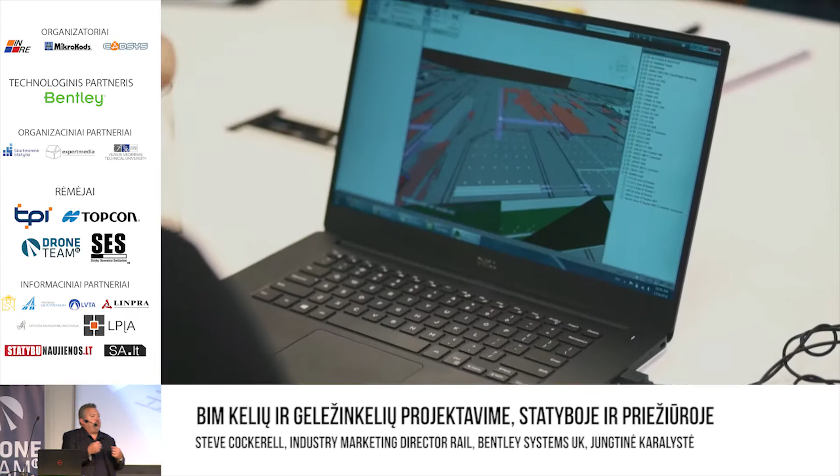I'll play the video so that you can at least see the pictures of the project. But basically what we're talking about, and what he's talking about, is the challenges that they had on this second of 3 lines that are being planned in the Kuala Lumpur area of Malaysia. They came across a lot of different challenges with managing all of the different relationships between the people, the disciplines, and all the data that needed to be exchanged amongst all of the different stakeholders.

And on this second of 3 projects, they look to put things right by using what we call a connected data environment, and that's where I'm going to go on to next, because that connected data environment, or CDE, is another reference to the beyond. We're moving beyond the common data environment to a connected data environment. So it's important to understand what that means.

At Bentley, we talk about digital context, and that can mean many things, from the reality models that you've seen to traditional survey information, anything that provides context to the job that you're doing at that particular time. Digital components, and that can be many different things. I work in the rail area for Bentley Systems, and we're working with Siemens, for example. So components to them might mean the different catenary components, the overhead line engineering components and structures and wire. But it's the components or the objects that are actually created and built and become your assets in the future.

And then the all-important workflows. And we saw right from the very first presentation this morning, those BIM workflows, including PAS 1192. And after the break, you'll hear from my colleague Ian Miskimin. And that's really at the core of our work with the Crossrail Academy, and a lot of the reasons for why that has been such a successful exercise.

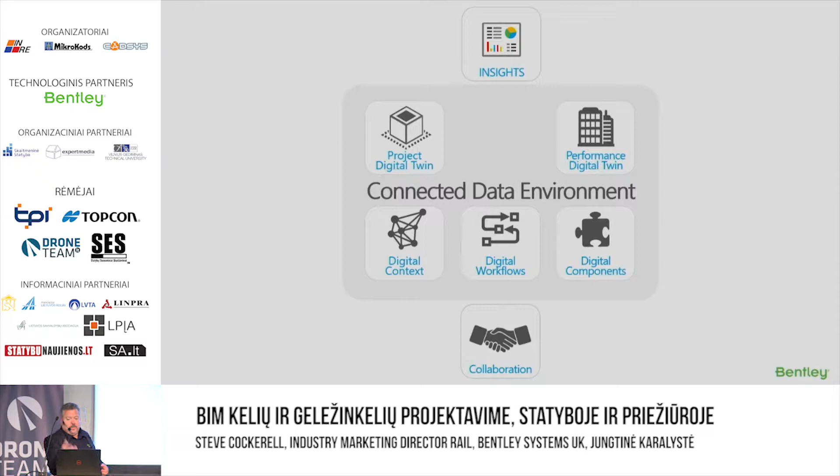Because the CDE goes not just through design and construction, it covers the whole life cycle. And we're creating both a project digital twin, a project digital version, and a performance digital twin. One that we can gain insight into using iModels throughout the process, gain insight to enable better decisions during the design process, or indeed on how to more reliably or more effectively manage your assets as an owner and operator. And as Stefan spoke before about ProjectWise on the collaboration side as well.

So for the main part of my presentation, for this last half an hour, I'm going to spend about 15 minutes each on both road and railways, and give you an idea of our current solution, both for the 2 industries that I work within. But I'm going to kick it off with roads.

And hopefully you will have heard of OpenRoads. It's the successor to a number of products that Bentley had in the civil design space. And it goes and takes us through predominantly design and build, but thinking of the future into operations, which is where I'm going to start using some AssetWise tools. Now, AssetWise, as the name suggests, is helping you get wise on how your assets are working, how they're deteriorating in condition perhaps, and how you can change the decisions to improve the outcomes.

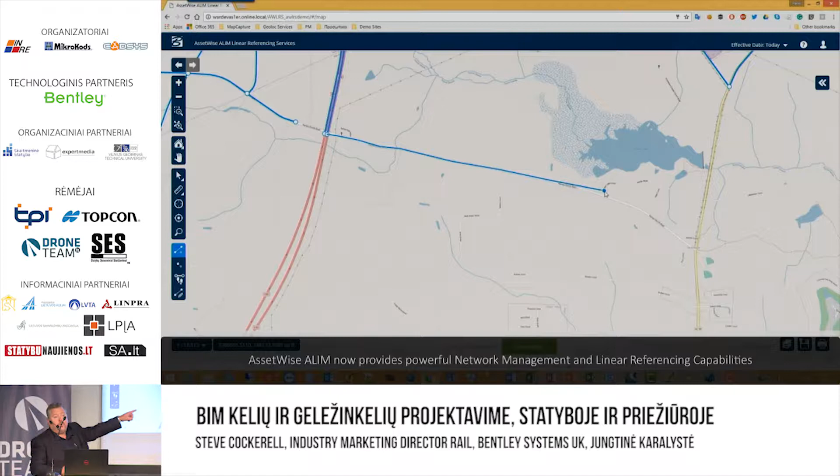So here we're looking at an existing road network, and we're using our AssetWise linear referencing system to be able to say we're going to actually look to put an upgraded road between these 2 major roadways, we can actually assign various attributes to them that become part of the information that we will manage.

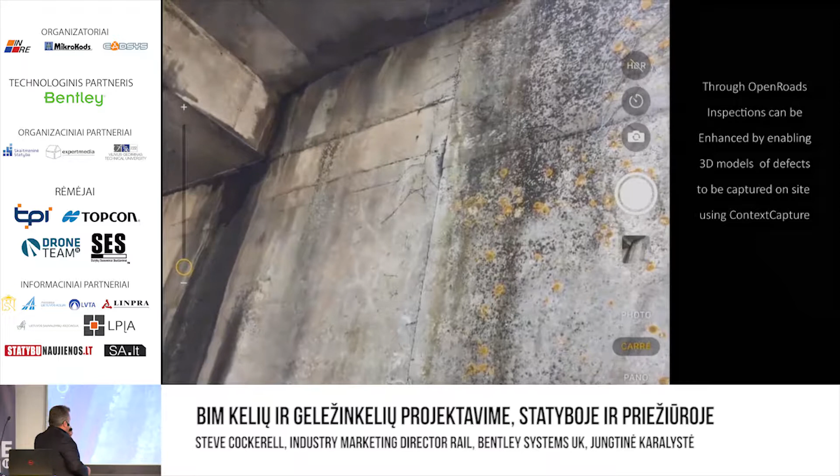But the key reason for me to show you this video is Stefan showed you the huge model of Paris that have been created from that contextual information, from the digital photographs. We can use it in inspection as well. We can use it in operations. And here, the guy in the field or the girl in the field is taking pictures with their mobile phone, and then we can send those up to ContextCapture.

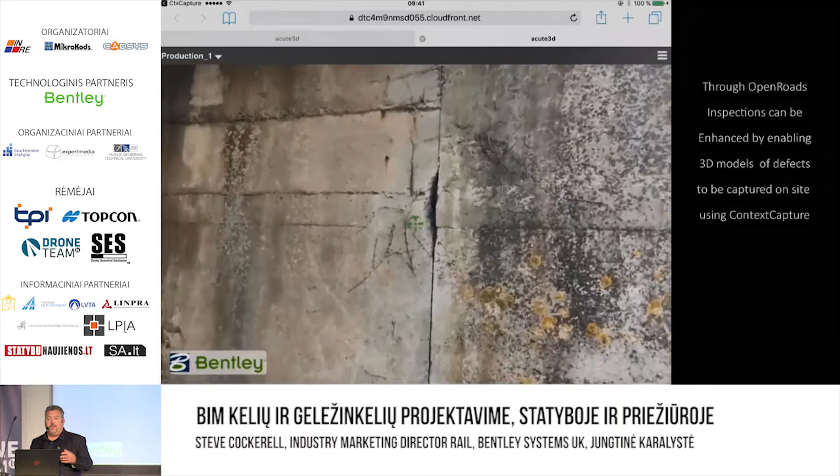You can see it's only a few pictures. And up in the cloud, we create a reality mesh. We create a 3D model that we can then move around, we can view, we can measure, we can interrogate, and importantly, we can store as a record of the condition at that point in time against our asset database.

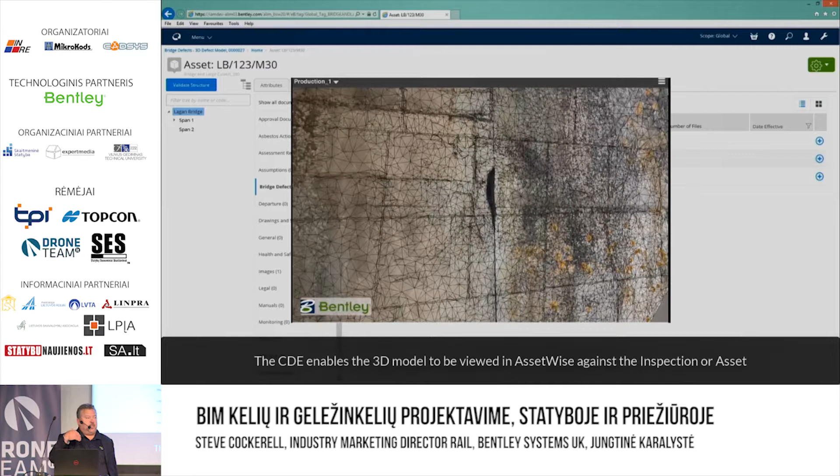Now, that information can be used to perhaps do remedial works on the bridge, or perhaps it's a reason for a bridge upgrade. You're using that information during an operational part of the life cycle to aid your decisions in design and construction, which is where I'm going next.

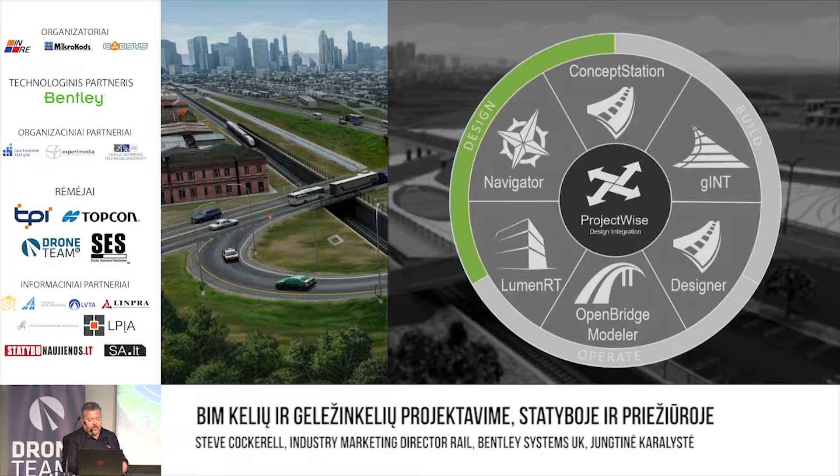In design, we have a number of products under the OpenRoads banner. We have conceptual design with OpenRoads ConceptStation, gINT geotechnical solution, and earlier this summer Bentley acquired two companies in the subsurface area of the market, called Plaxis and SoilVision. You may have heard of them, and they really do strengthen our subsurface capabilities. Then Designer and OpenBridge Modeler for highways and bridge design, before looking at visualization, and as Stefan showed, Navigator for BIM review. ProjectWise is always there as part of our CDE to help with design integration.

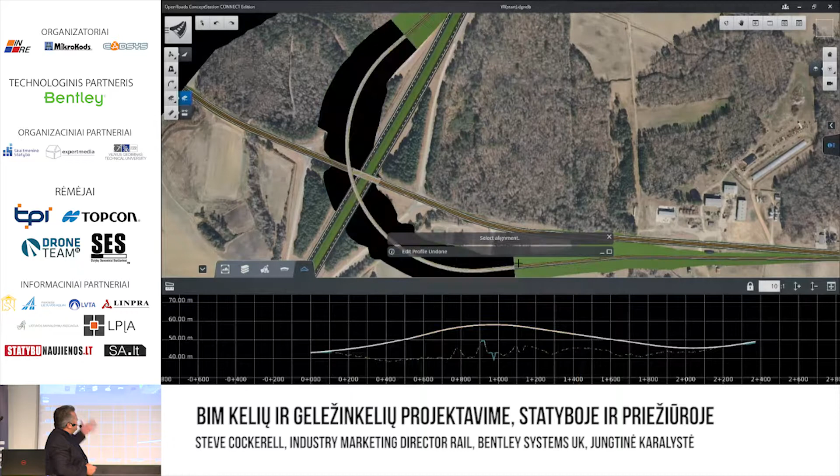Just a short example of a context capture reality model. You can see how ConceptStation allows you to draw in your proposed roads. We're changing an earthworks length of roadway into a bridge section. It's very interactive, very easy to use. We can go in and change the design in any way we want to. Here we're seeing how a link road is designed between those roads, a ramp is designed between the two, or indeed we can design roundabouts in there.

Hopefully you'll see how interactive and how quick and easy it is to start planning your scheme and your projects. Importantly, at any point in the process, you can click on a button and find out the financial implication of all those decisions you're making. So you can create really inspiring designs, integrate all of the different disciplines, and find out, as it shows right about now, the financial impact of those decisions at the earliest possible point in time.

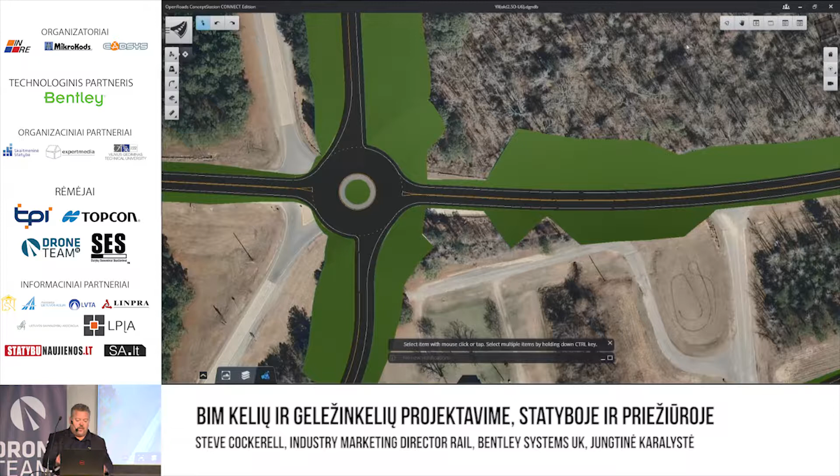CCCC First Highway Engineering in China is a project I wanted to highlight because they had some really quite serious challenges. They needed to model over 3,500 subsurface utilities, and they had 8 major interchanges to design in just 9 short months. They used OpenRoads ConceptStation and Designer to do just that.

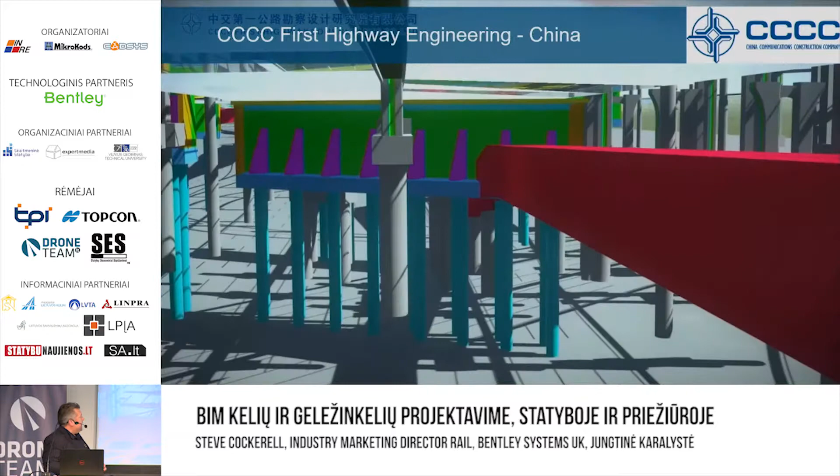This video shows how the clash detection, or more importantly the clash resolution tools within Designer and Navigator, helped them move underground ducting away from all of the different foundations for the new road. That's really what I mean about improving design decisions. Imagine finding a clash between two different disciplines out in the field, and how much money it would cost to fix a problem like that. That might be an extreme example, but it's about solving those problems as early in the process as possible.

CCCC First Highway have improved their 3D collaborative workflow. They've taken out a whole lot of rework that they had experienced on previous projects, and optimized the sharing of information across all of their different disciplines and departments, with some quite significant money savings as well.

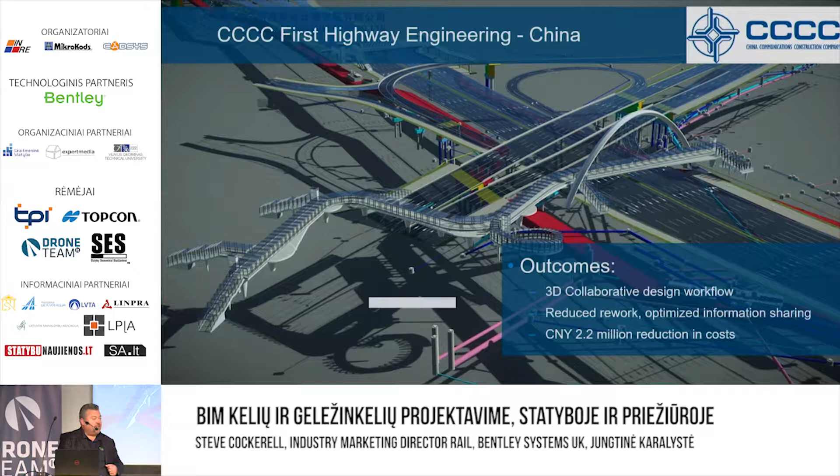Now, one of the other things I mentioned was visualization, and I think visualization is about communicating. They say a picture paints 1,000 words. Out of OpenRoads Designer and ConceptStation, we can leverage a piece of software called LumenRT to create some really lifelike renditions, visualizations, and simulations of our projects.

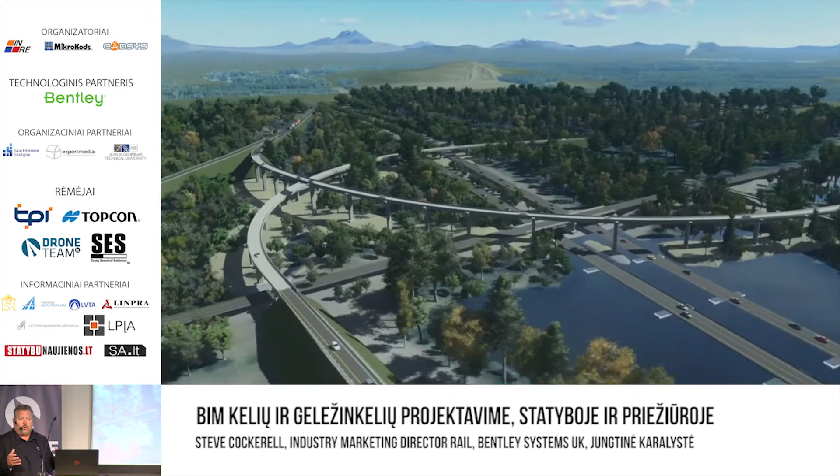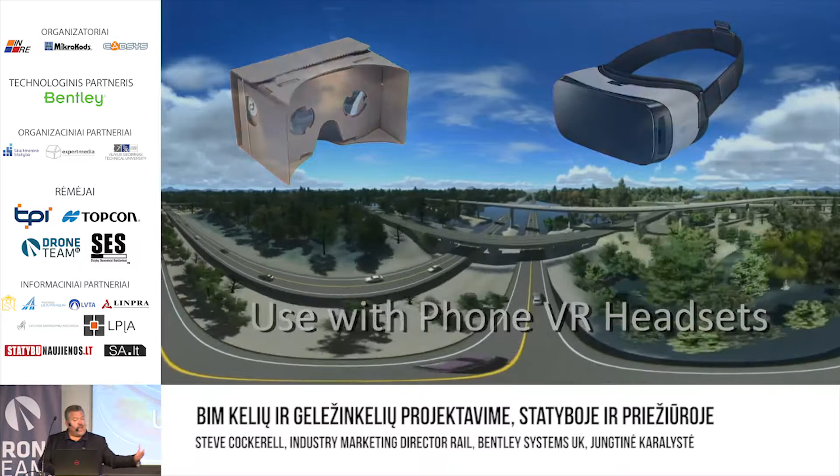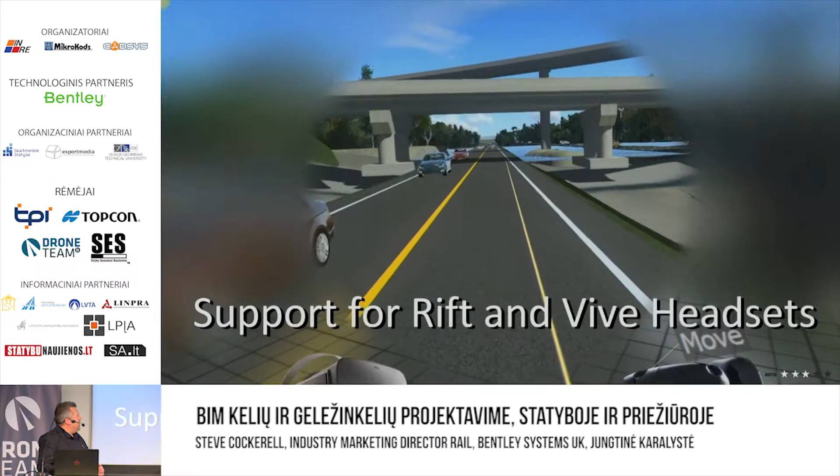Here you see we can also move into a simulation environment. We can leverage VR and augmented reality directly from the engineering models, to be able to immerse yourself in the design, or immerse your customers or members of the public in your design, to communicate and convince them of the value of the projects or infrastructure you're designing, building, or operating. So really changing the game in the way that we can show our engineering designs now.

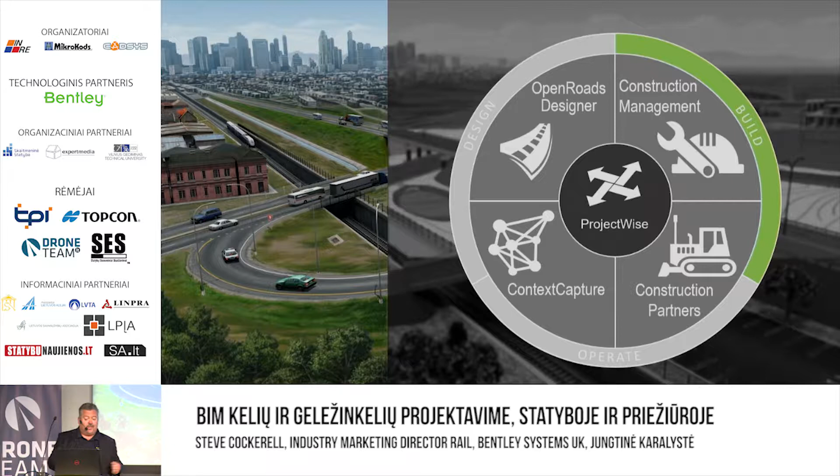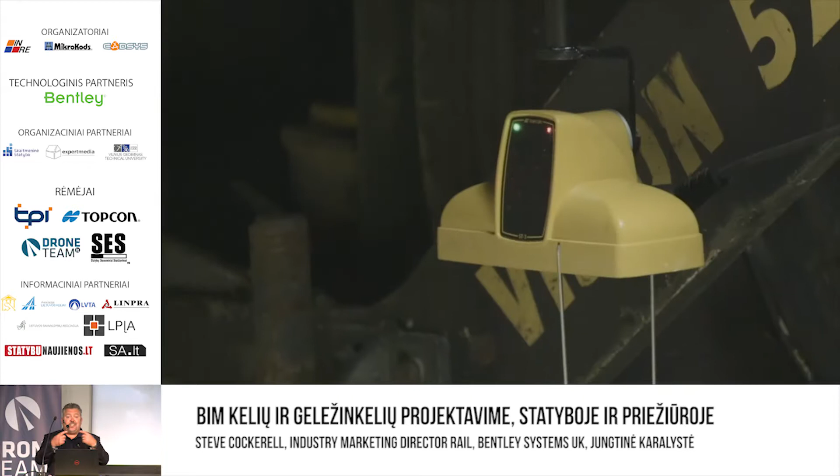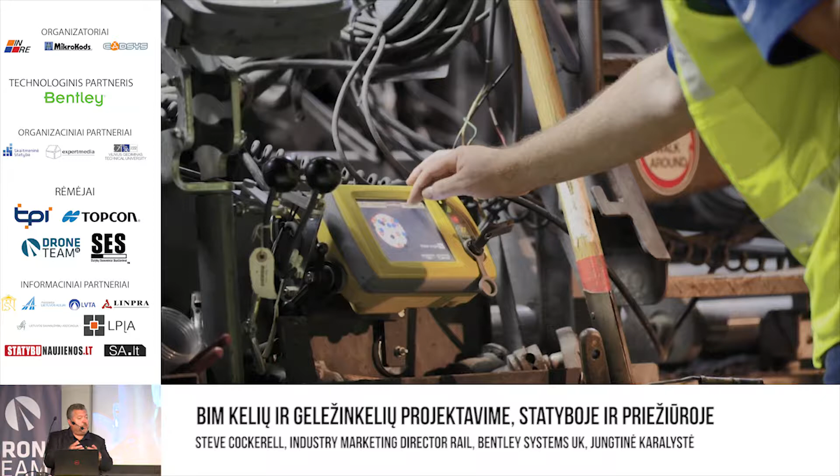Stefan mentioned our strategic partnership with Topcon, and we'll be joined by a colleague from Topcon this afternoon, so I won't dwell on this much. But through our CDE and Topcon's Magnet Enterprise, we can take 3D models directly into the field and onto the machinery used to construct these assets. Not just theoretically, but in reality, we collect information as we're constructing and take that full circle back into our design environment to compare the as-constructed model versus the as-designed model and see if there's a difference, keeping that as an accurate record. But more on that later.

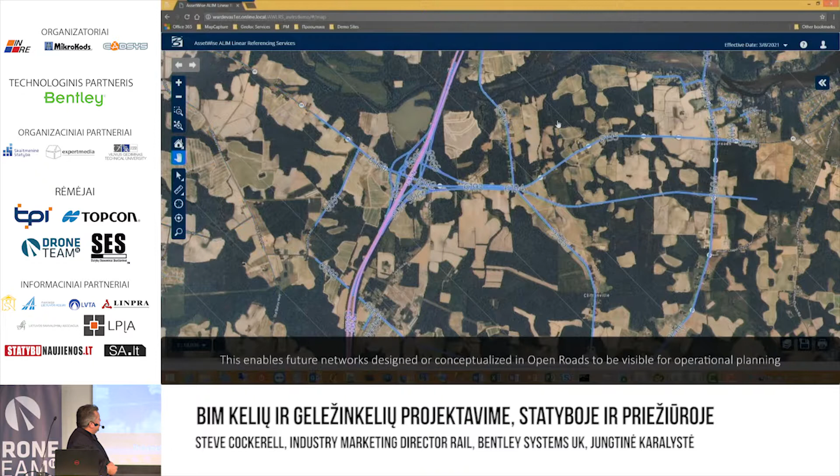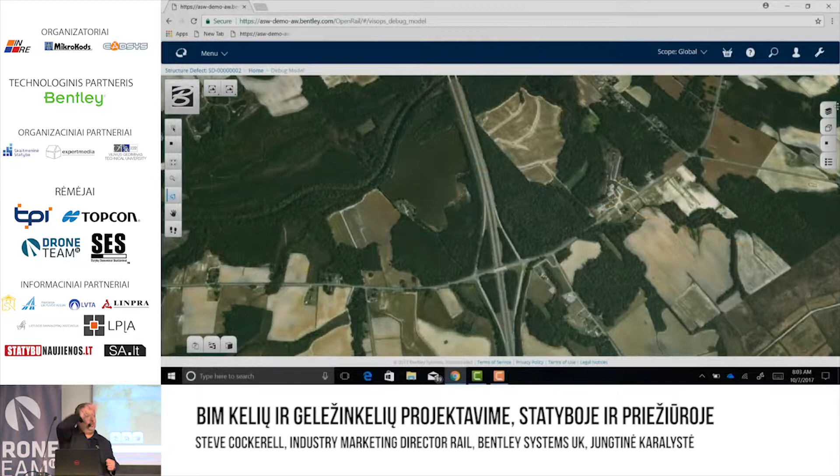As we move into operations, here we have our existing roadway, and we're just changing the date and taking information out of our CDE to update the interchange in that particular area. That is our state moving forward, our roadway network now managed as that upgraded interchange. So we've gone full circle, if you like.

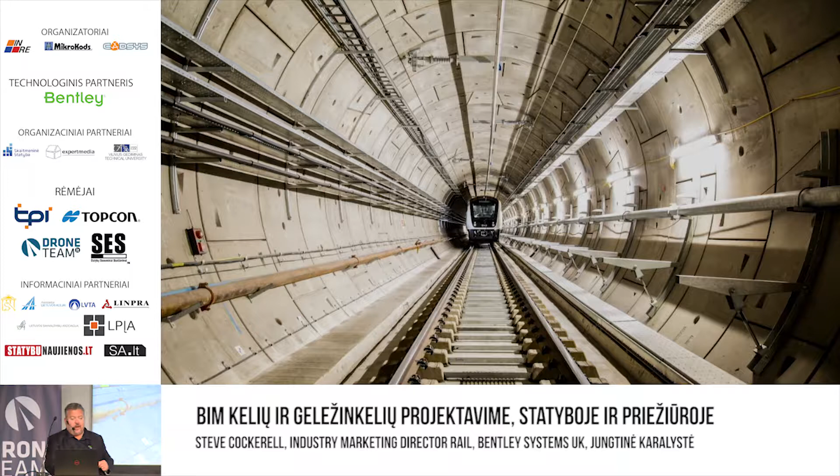You'll see all of the different disciplines involved, not just in designing and constructing the asset, but also maintaining it, which has to be done safely and effectively while you've got people moving through the system and across your rail network. So hugely complex, with a huge number of moving parts and people involved in design, construction and operation.

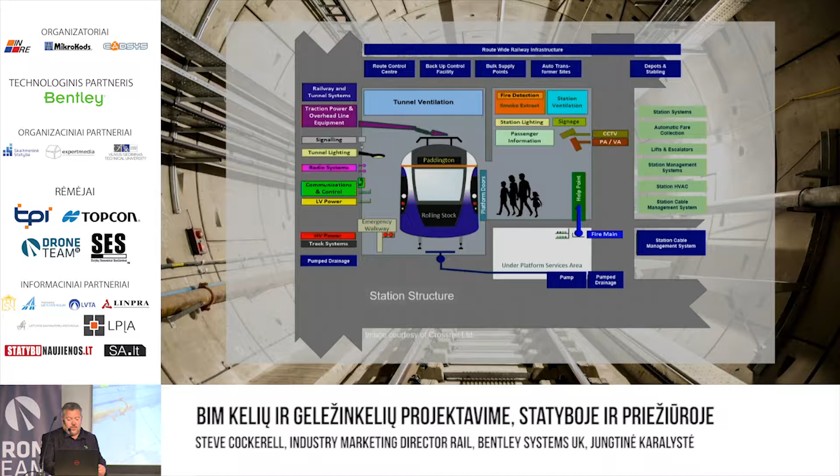And in rail, Bentley chose to take note of other industries. There are other complex industries out there, things like defense, aeronautics, space, or even some areas of manufacturing, that are using something called systems engineering - even in software development.

Put simply, it's a way of getting your ideas and your requirements all the way through preliminary design, specification, detailed design, construction, and then through testing and commissioning to hand over, so that at every step of that journey you ensure that what you wanted is what you're getting. And they use what we call a V diagram.

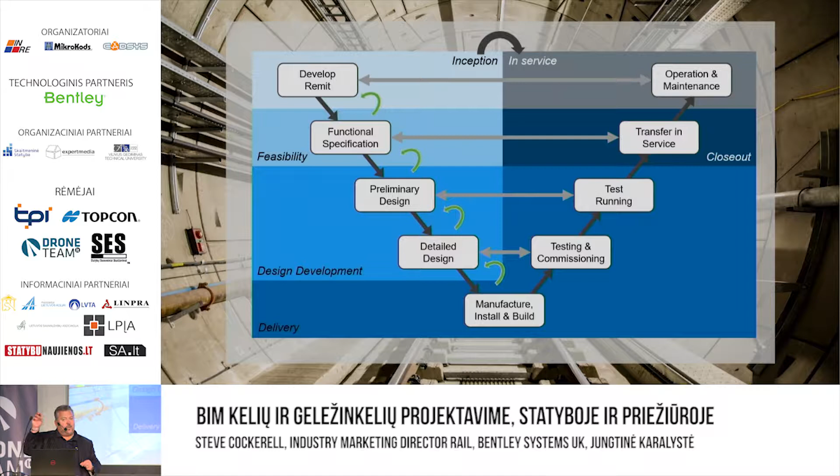Systems engineers use a V diagram, and this is just a simplified way of looking at how to go from your initial ideas through to the asset that you're operating and maintaining in the future. I'm going to use that methodology, that V diagram you see at the top of the screen, as my way of taking you through our rail solution, which is called OpenRail.

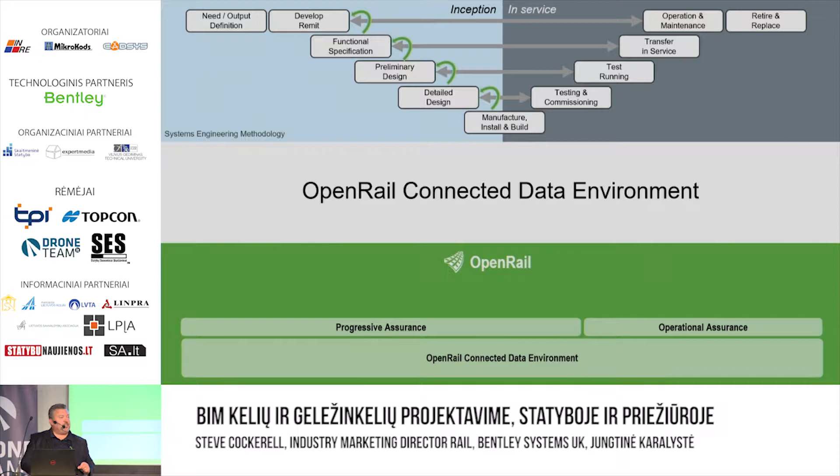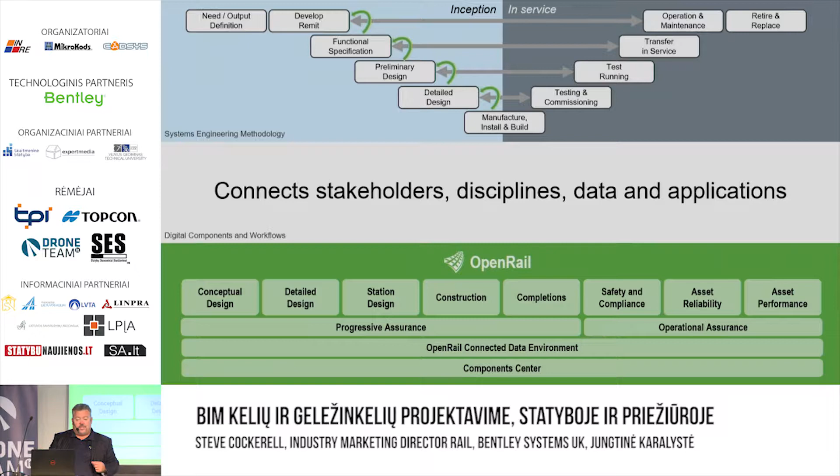In the same way as road is founded upon that CDE, so is rail. We have an OpenRail connected data environment that goes across the whole life cycle, through project delivery and onwards into operations and maintenance. As the slide says, it connects everything - all of the data, all of the people involved in the project, all of the different disciplines involved in the project or asset in an operational state - and brings them all together, allowing them to work more effectively together.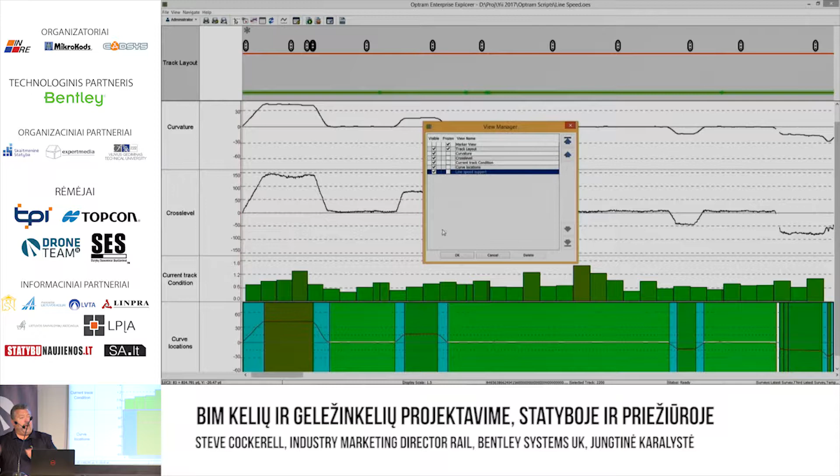Again, I'm going to start in an operational environment, because using Optram operational analytics, which is part of our AssetWise family, we can actually look at the existing condition of our railway, how it's degrading and how it's being maintained, and the geometry information that exists to make better decisions on our design projects, on future projects. In this example, we're running analytics on the existing geometry and condition to work out whether we can increase the line speed.

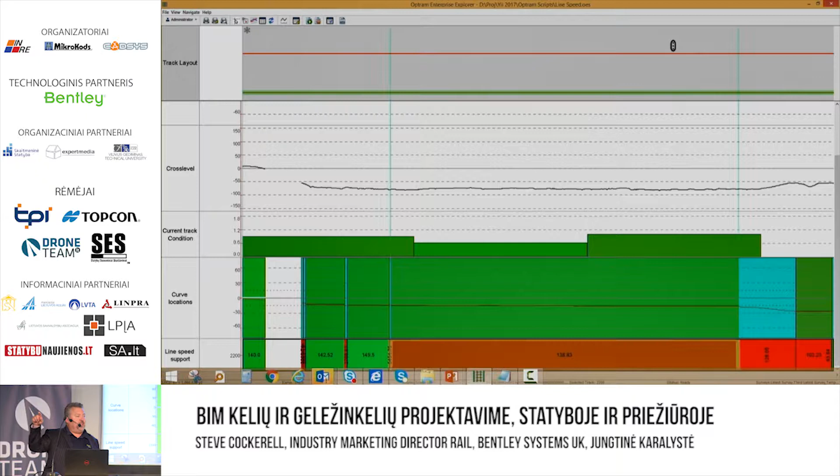So can we reuse this piece of track between A and B at a higher speed? By clicking on the red area here, it says no - according to the criteria you've set for your analytics, the transitions are too short at that point. There will be lengths in green, perhaps, that you can reuse, and then using that analysis you can set decisions and requirements as you move through and start up a new project.

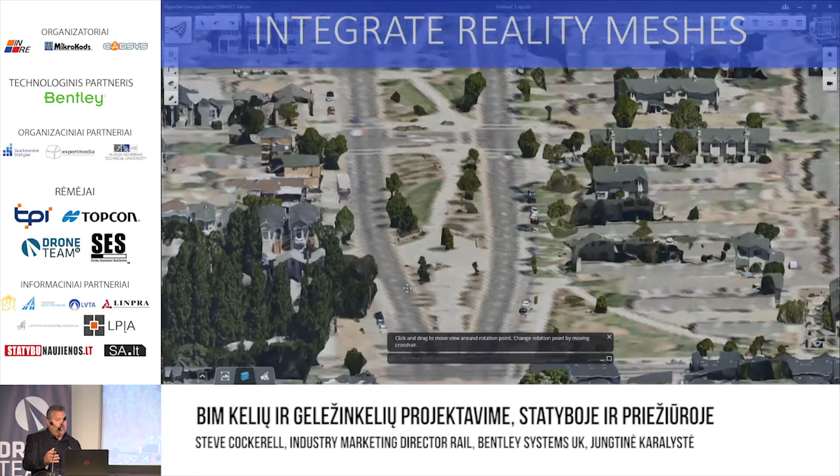On rail, we have OpenRail ConceptStation. I wanted to show this because it goes into a little bit more detail than the road example I gave you earlier. It allows you to bring contextual information in, reality meshes, survey data, or aerial mapping, whatever you need to provide context to the design work you're producing at the time.

Then you start to explore your different design options. Sketch out your design. Where's the new railway going to go? Where are the key points on the design? And you can interactively change that design so you can refine it.

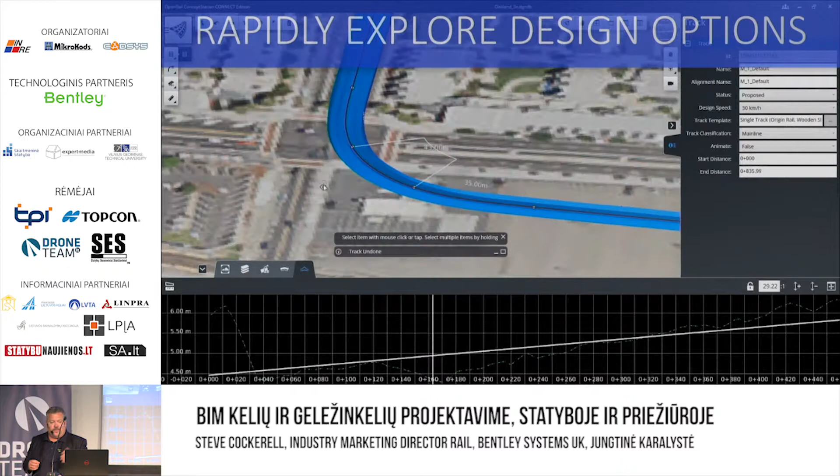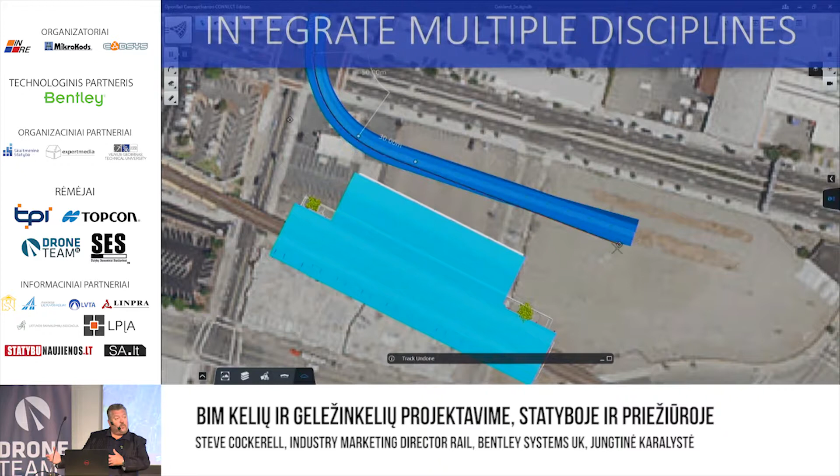In this case, we've got a new railway that we're going to put down the middle of a street. Now, railways tend to be connected by stations, so you might want to bring in a station model designed in Bentley software or another piece of software. Here in 3 dimensions, we can import and reference our station design and then adjust the 3D geometry of our track to match that.

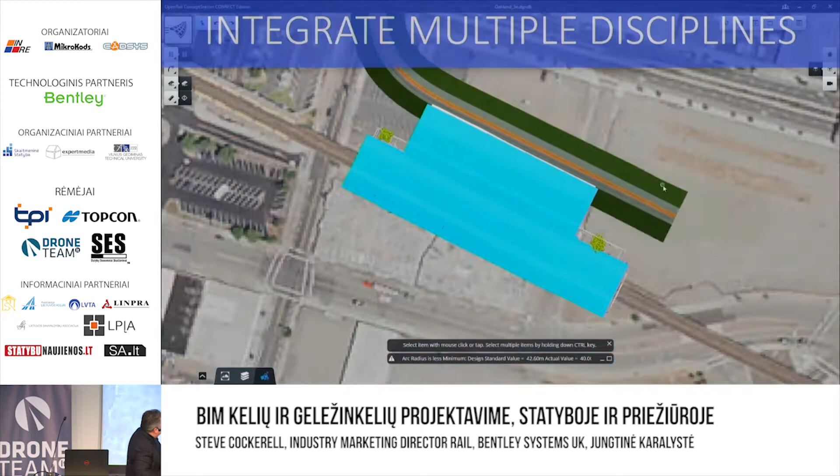You see you've got a profile alongside your perspective view there now. Those of you keeping up with the way this is moving through will recognize that we've got earthworks in the area of the station, which is no good. So we might want to change it to a bridge. You can change the asset types however you want to.

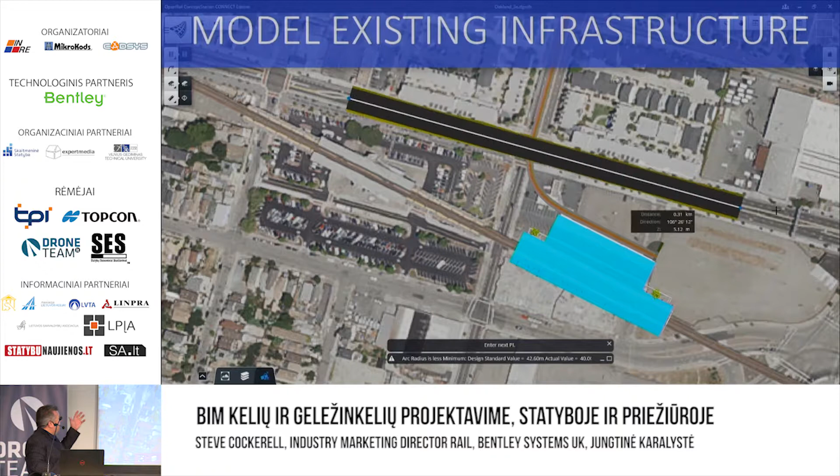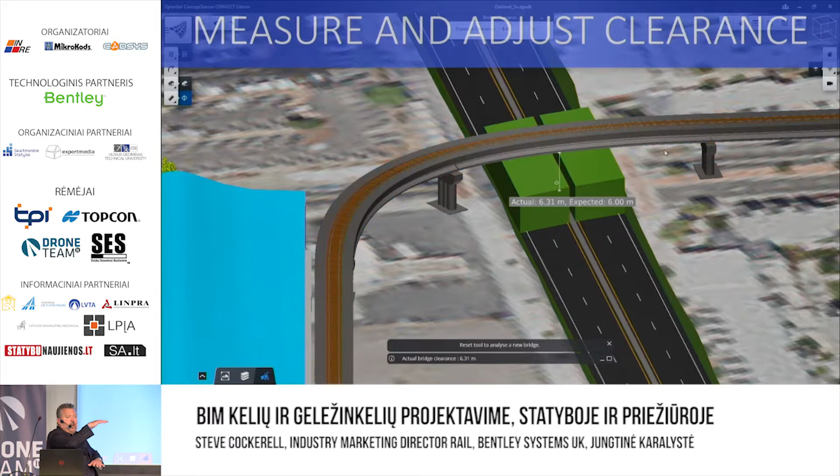You can adjust the design in many different ways. You can model the existing infrastructure, because you're going to need the required clearance between your new track and your existing roadway. Very easily we can say we need 6 meters clearance between the new railway and the roadway. When it's red, no good. Lift the geometry of our railway, it turns green, and we know we're good as far as clearance.

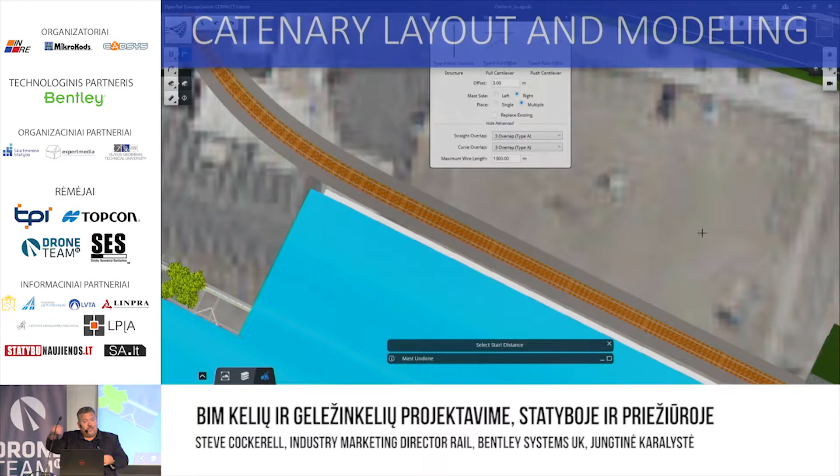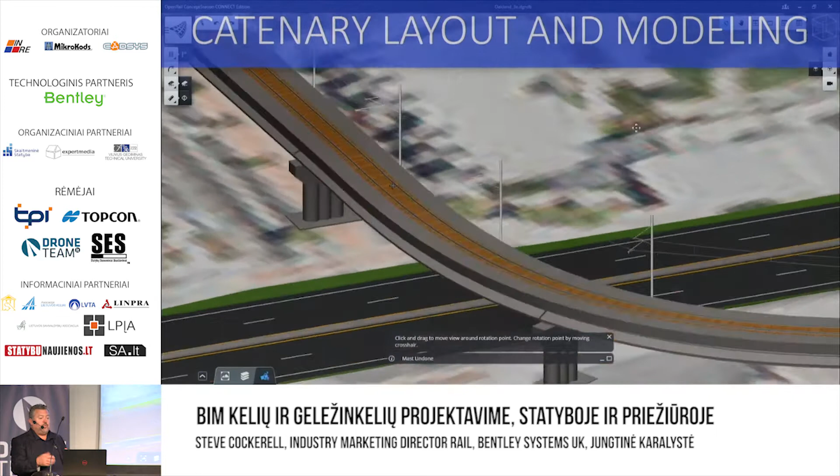So it's very visual, very interactive. We can move the different components and tweak the design as and when we wish. Now we can also start to add other assets, both linear and isolated or individual instances of assets. Here we're adding the overhead line, purely in a conceptual and layout way, but we can model the masts, we can model the catenary and the wires, and change the types and reassign those.

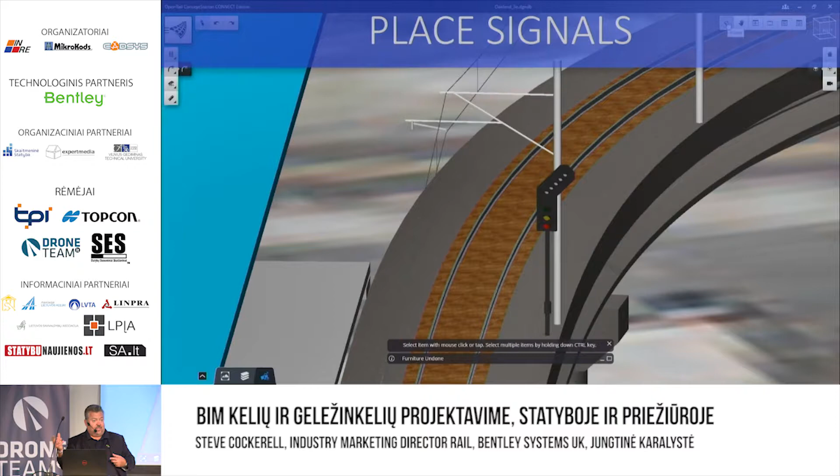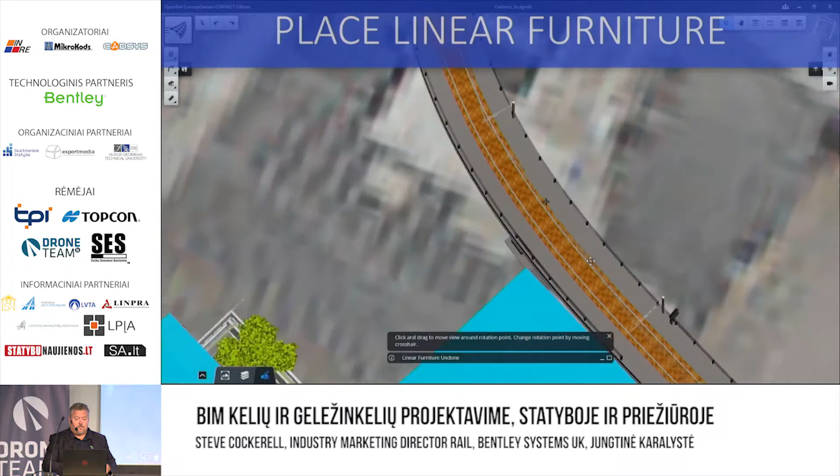I mentioned our relationship with Siemens, and we're working with them to link their SICAT Master overhead line design system, a detailed design system, with our own Open Rail solution. Earlier this week I was in Berlin at InnoTrans, and Bentley and Siemens were previewing that software on their booth. But we can also place barriers, signals, and get costings out at any point in time so you can understand this.

Here's an example of that. You can get a full report, take that out to Excel, or pass it to your own costing solution as well, and then finish up creating some really quite visual designs.

Moving on. We're finding that more and more of the Bentley users I speak to are being asked to go further into the design work to actually win the job than they did before. A lot of the time spent on conceptual design, if you don't win the job, is wasted. But even if you're lucky enough to win that contract, then you've got to almost start again.

Well, with Open Rail, we're removing that step. You can take all of the designs created in Concept Station all the way through into detailed design and reuse that design work, reuse that engineering information, to actually add the detail required for later on in the project. The product we do that with is Open Rail Designer.

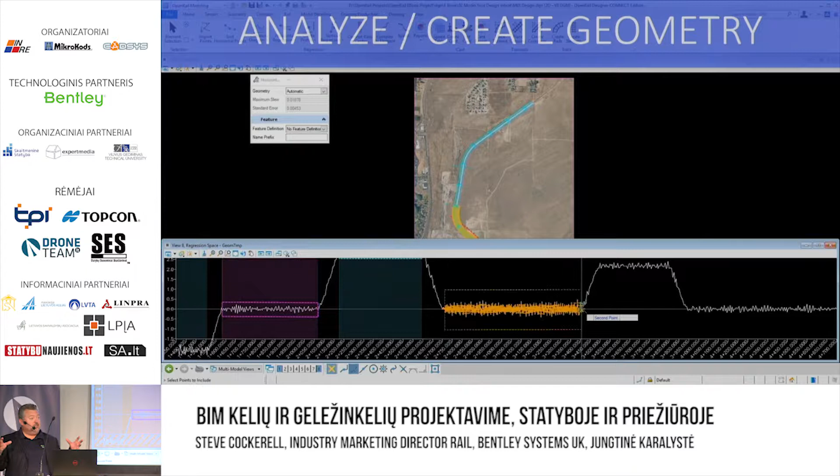So here's another short video of Open Rail Designer, which was launched earlier this year. Here we're actually looking at existing surveyed information and working out where our straights, our transitions, and our arcs are. We're using what we call regression analysis to be able to extract the geometry very quickly and easily, to build your track or centerline alignment.

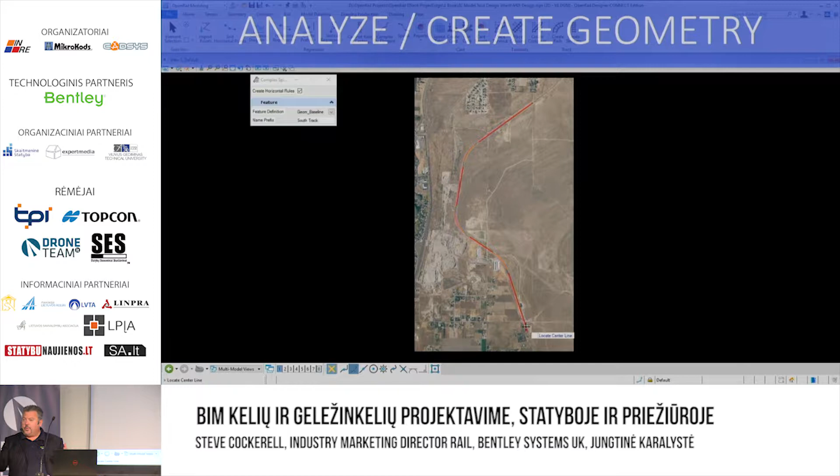And you'll see it's over some aerial mapping there, and we can extract all of the geometry information, coordinates, straights and radiuses. We can place turnouts to lots of different international standards and different classes of rail and transit, be it high-speed rail to street rail, trams, or indeed metros.

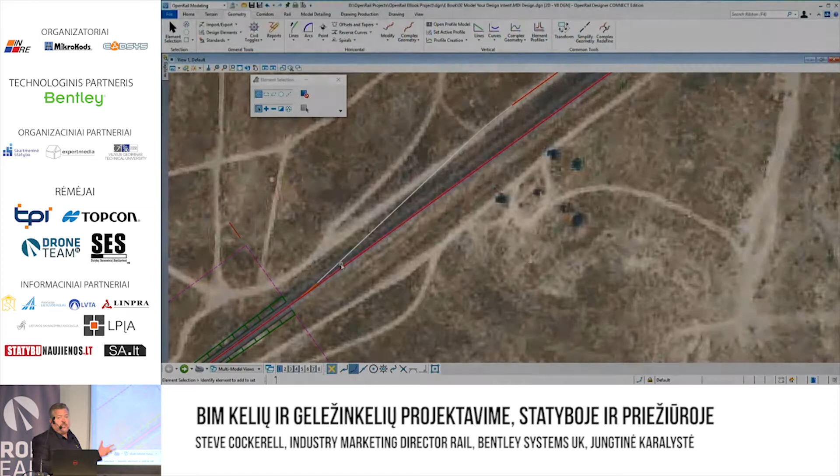It's very interactive again, but at a detailed stage where we've placed a left-hand turnout. We're going to link these two pieces of parallel track. It does all of the connections for you and trims the track very quickly and easily, and makes sure it's to the right level of accuracy that you need.

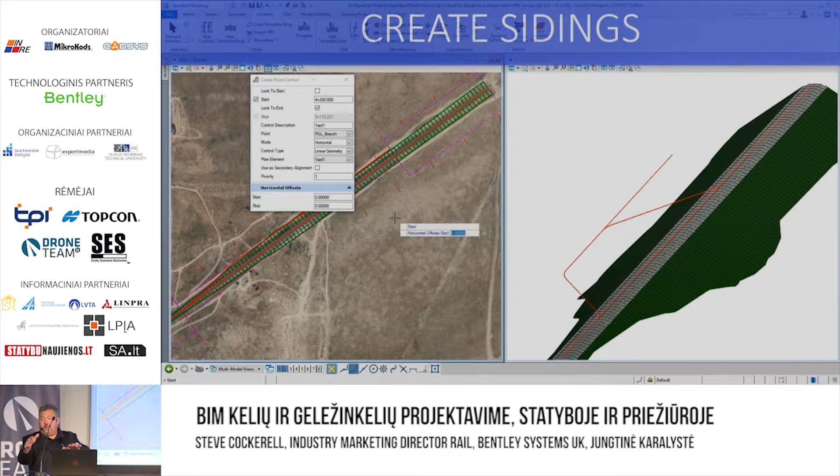In 3D, so we can apply cant or super elevation to our design, or as we see here, design sidings or marshalling yards very quickly and easily in 3D, and start the corridor modeling of our railway as well.

Where are we going next?

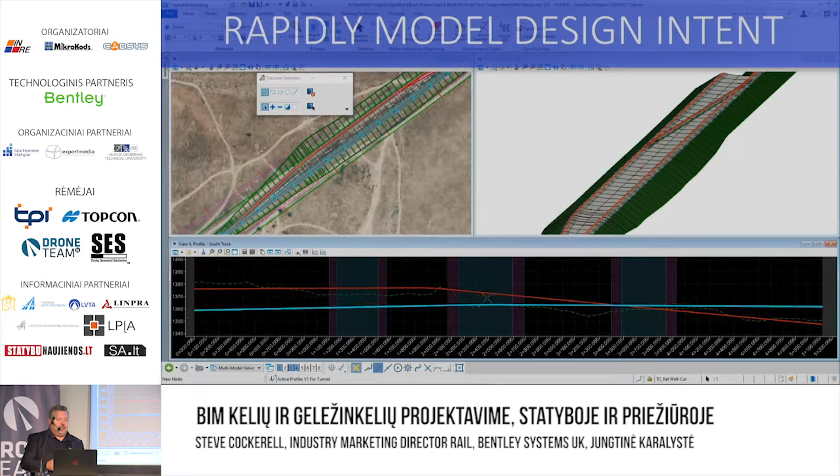So if your design changes at any point in time, it can be quite a task to actually rework or re-engineer as a result of those changes. We call the modeling of design intent the ability to actually recover more quickly from those changes. So we can relate different parts of the design and rules to how they behave.

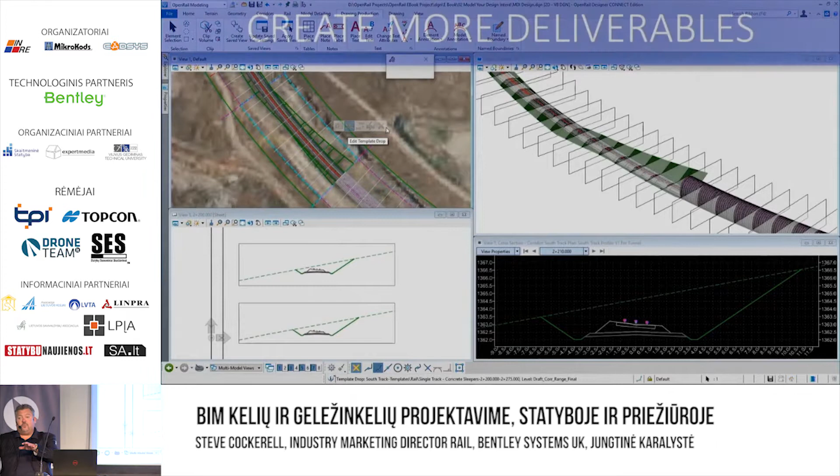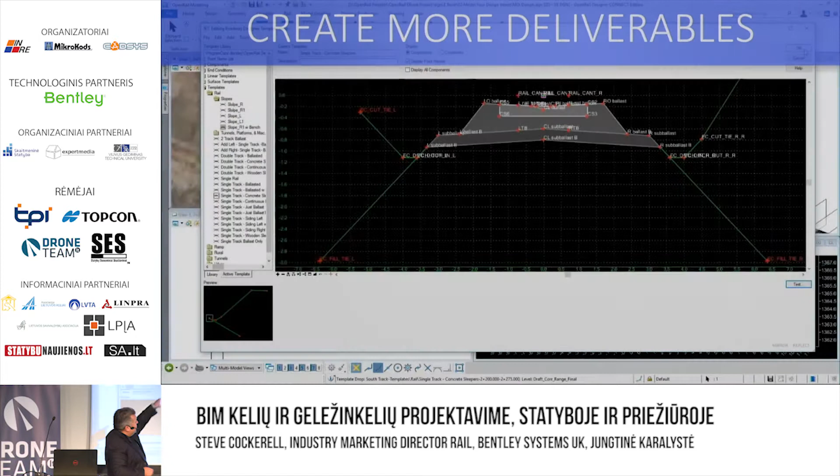So if an alignment moves, either in 2D or 3D, those design changes can ripple through. You see another example of that here, where we're taking out an earthwork strategy on the right-hand side there and just changing it for one with a ditch. And if you watch very carefully after we click OK in the top right here, you'll actually see the design change in an instant.

And with that, not just your design, but all of the drawings, your plans, your profiles and sections that have been created as a result of that. So those design changes ripple through all of the rest of the workflow and onwards into construction.

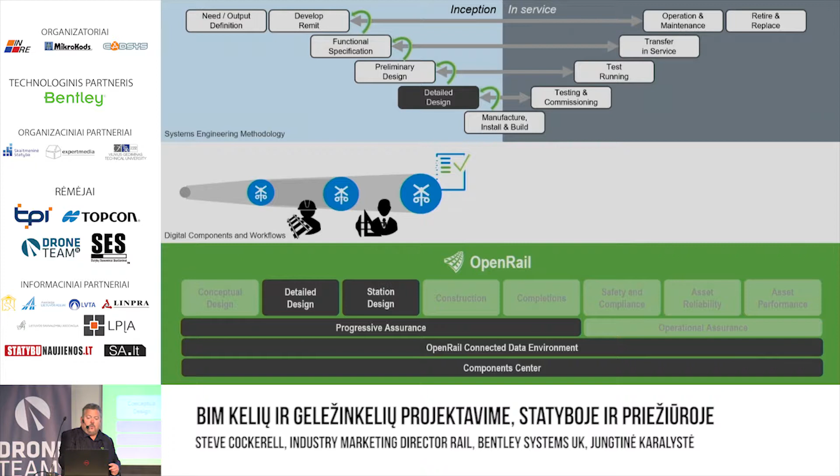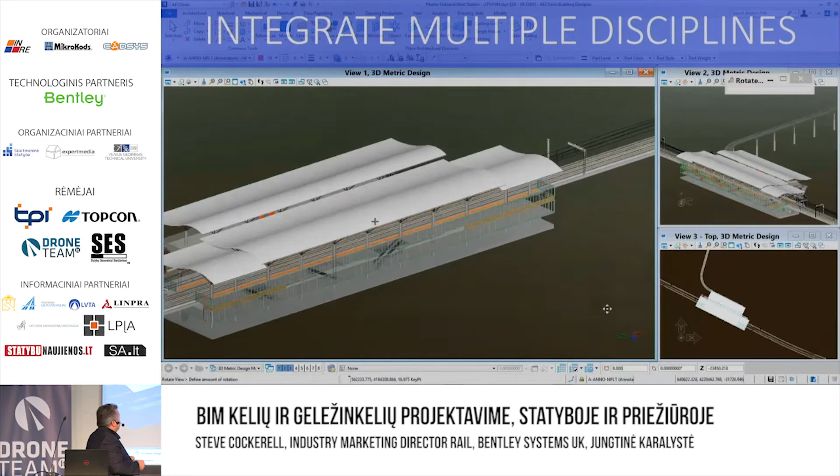But in its current form, it allows you to bring all of the different disciplines together. So here we can see our station model alongside the bridges and the track and the overhead line. We've got a reality model in the background, adding further context to our design work. But Building Designer and Station Designer allow you to model buildings of all types, sizes, or complexity.

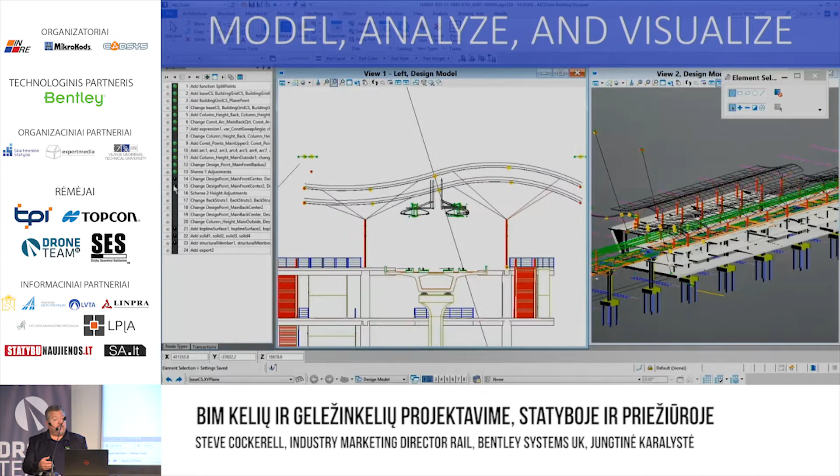You can model them and analyze and also visualize everything to do with that building, including, as we'll see in a moment, construction sequencing and simulation within our OpenBuildings Station Designer product, which will be available soon. That's pretty unique to Bentley's open rail solution.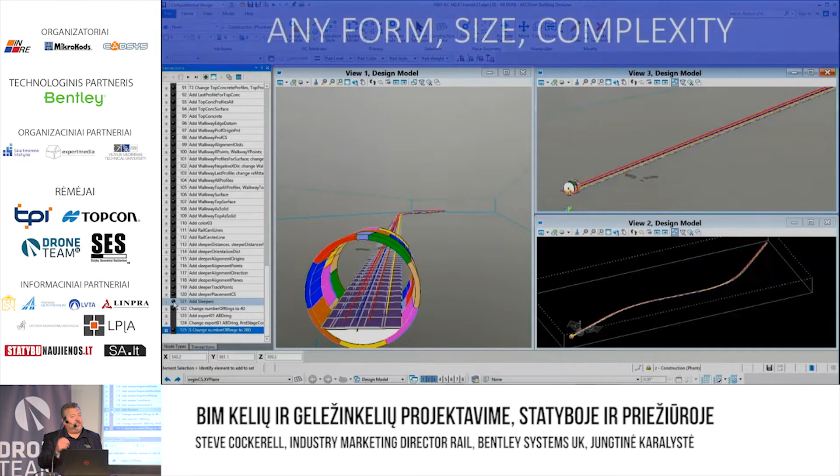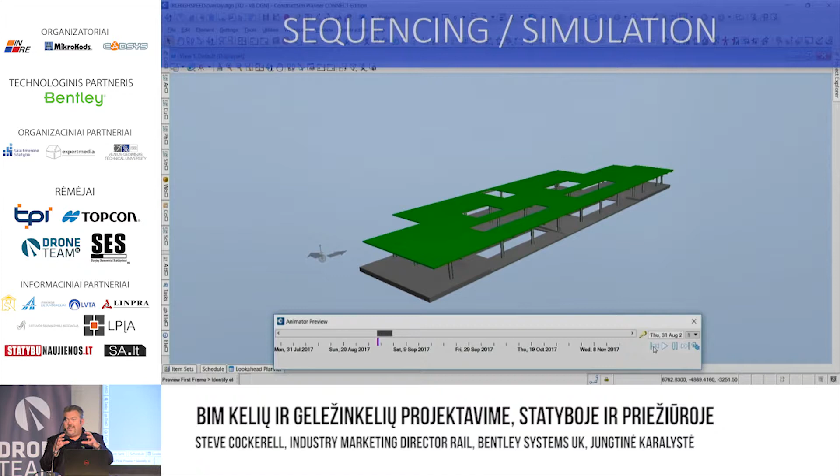Those competitors that we have in this area can bring the information together, but it requires exporting the data and importing into different packages and environments. And of course, every time you transfer information, you export information, you risk devaluing it, you risk losing information. So being able to model everything in that same modeling environment, that comprehensive modeling environment, is a very valuable differentiator between OpenRail and its competitors.

And you see here just some very simple sequencing and simulation. I will just mention the acquisition that Stefan spoke of earlier in the morning, that of Synchro. We will obviously be integrating Synchro and its capabilities, which are very well respected globally, and a lot of their business is actually focused in the rail area, into our OpenRail solution in due course.

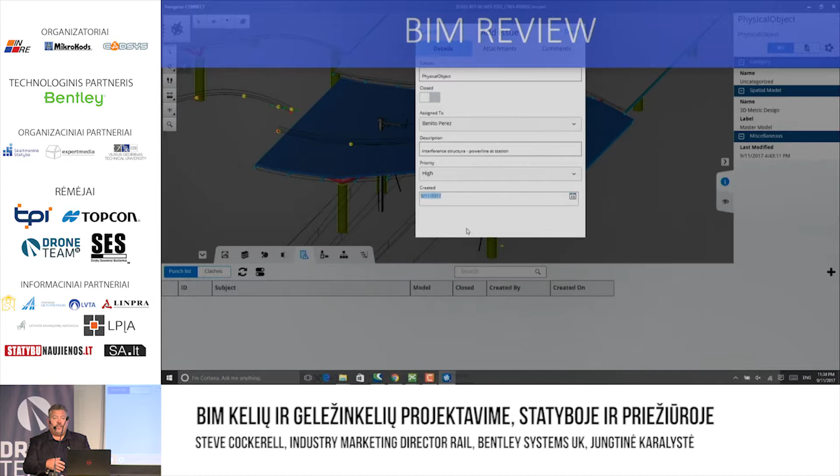I won't spend too much time on BIM review, Stefan has already spoken about it. And we've got a rather extreme example here where we've got an overhead line structure actually poking through our roof structure there. But really it's about bringing all of that information together to spot things like that whilst it's still in the design office, and not whilst you've got people and machinery waiting around costing money. It's about optimizing both the design and the construction schedule as a result of using technology like OpenRail.

Really, it's about getting it right first time, using technology to help you do what you do best, better, and get it right first time, every time. Because ultimately, we want to hand over a safe, compliant asset to the owner so that they have a good base upon which to maintain the asset into the future.

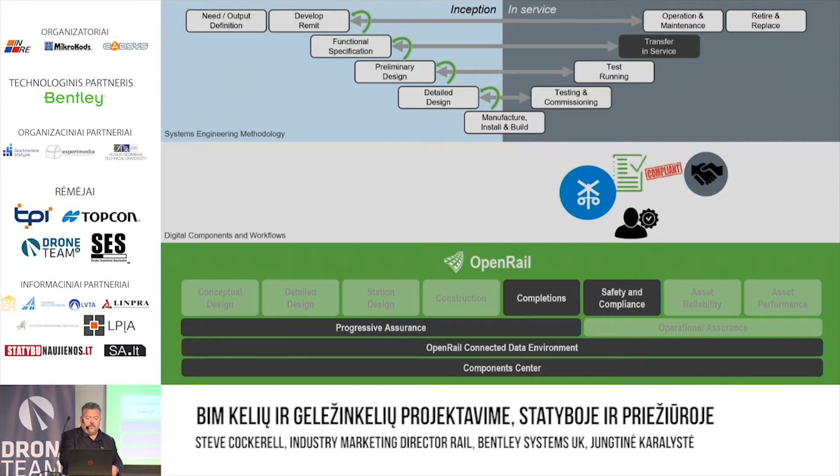Now, straight after the break, Ian Miskimin is going to be talking to you about Crossrail. How many people have heard of Crossrail? Quick show of hands. So maybe just under half. Crossrail is a new east-west rail link across, or actually under, the city of London, up to about a depth of 30 meters below the surface. And if you can imagine the underground network under London and all of the buildings and their foundations, that's quite a complex 3D challenge, as well as, because of the scale, technical challenge and contractual challenge.

It's using public money, so the media is very much focused on its success. It's had a set deadline for completion, which, while that has in the last few weeks been reported as slipping, actually there was a really good article in the Financial Times last week that spoke about it.

The success of Crossrail is in the engineering, I won't say perfection, but the engineering value created throughout the project. And actually, while it did or has gone over time and over budget by a little way, if you compare it to the majority of other major rail projects around the world over the last 15 to 20 years, it's an insignificant overrun in relation to the rest.

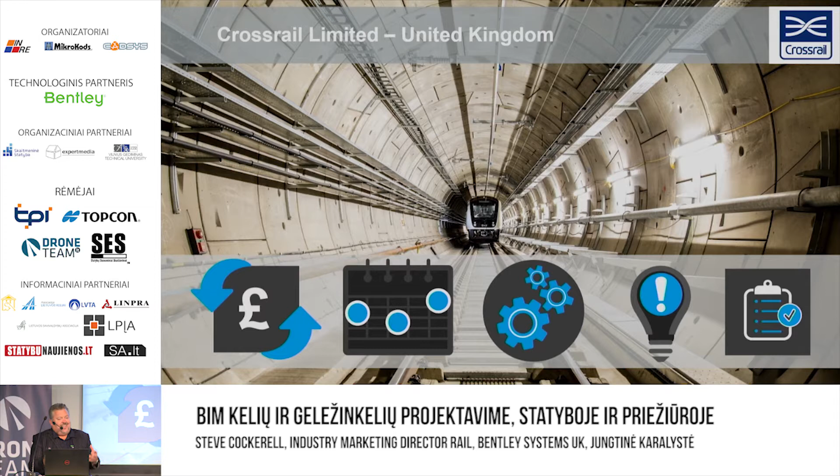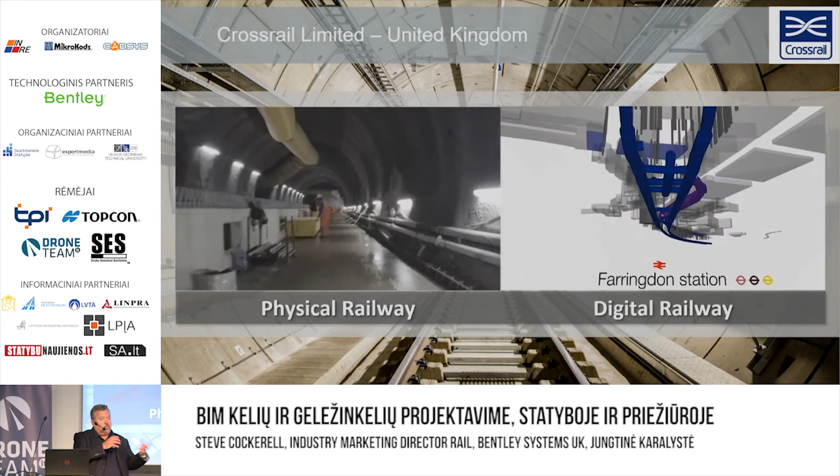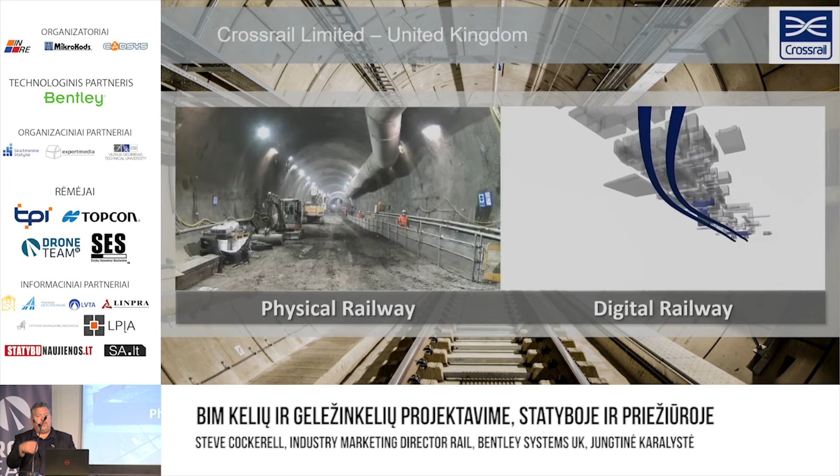And their vision, if you think back to some of my starting slides when I started to talk about the CDE, we had the project delivery twin and the asset performance twin. They talk about delivering two railways: the physical railway that they are nearing completion and are already running trains down as part of the commissioning process, but also a digital twin, a digital version of that railway that is an exact replica that will be used as the basis for their ongoing maintenance of that railway into the future.

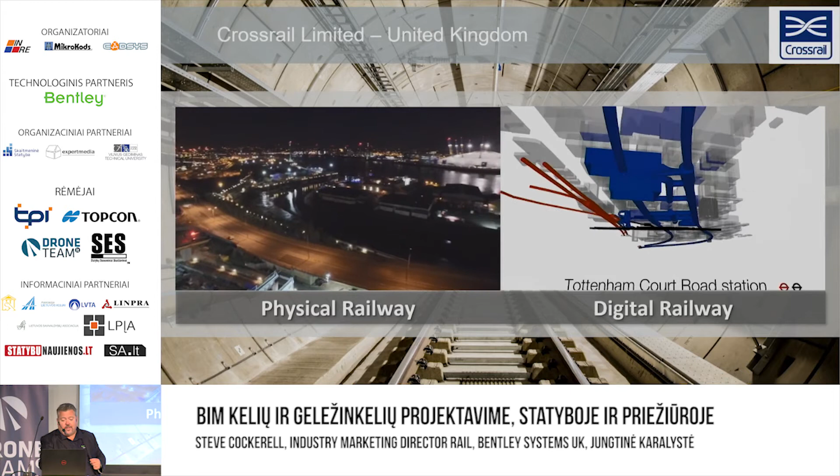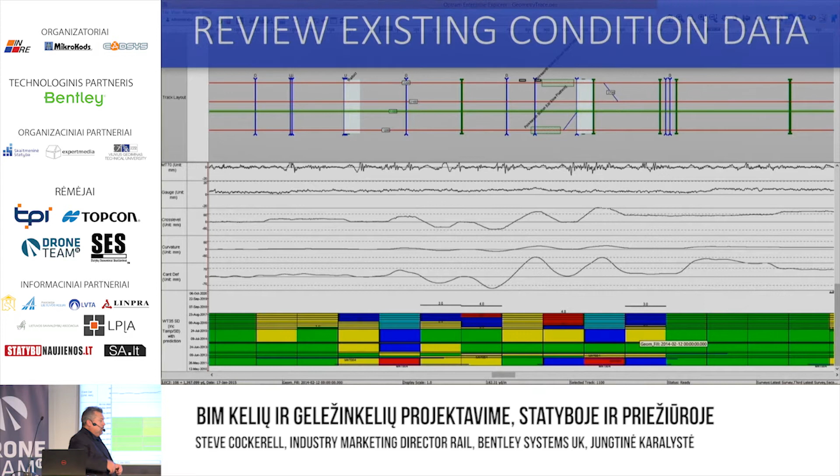So to finish, we're dropped back into operations and maintenance, because here we've got an existing railway. We've sent a track recording vehicle down it, and we can look at how the track is degrading, how we're maintaining it, and start looking at trending of information.

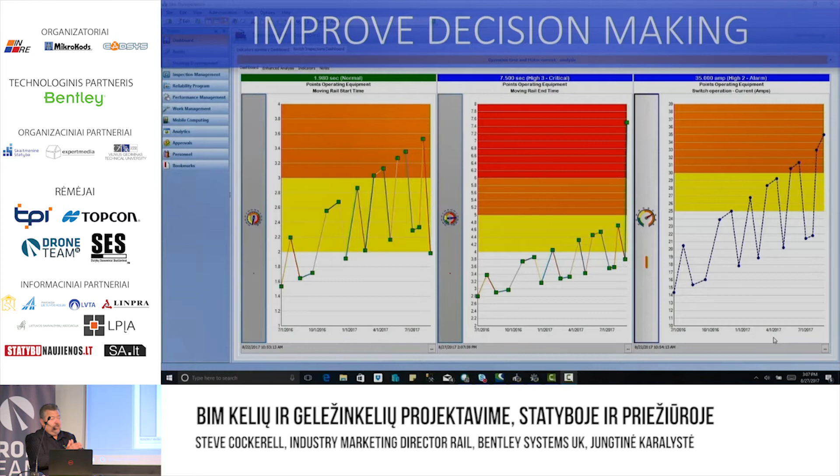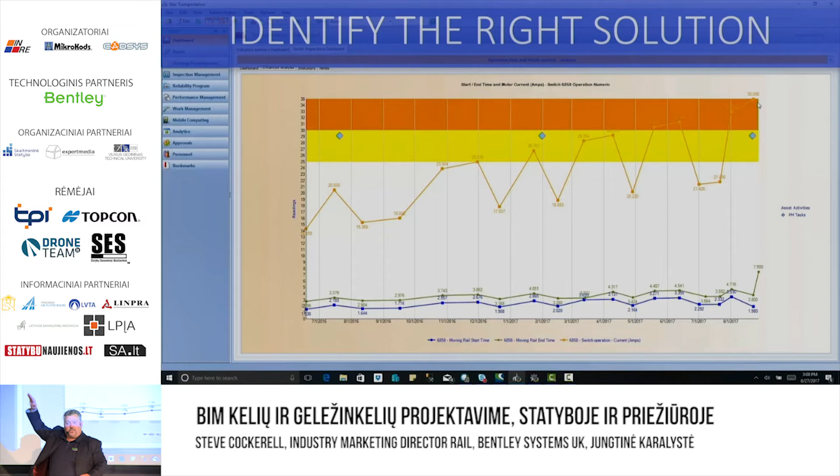I mentioned big data and sensors in the infrastructure. Here, we're looking at some reports from a point, a switch. And we're seeing actually that the time it takes to open the switch has increased dramatically, and the power that it's using has gone way, way up, higher than it should be.

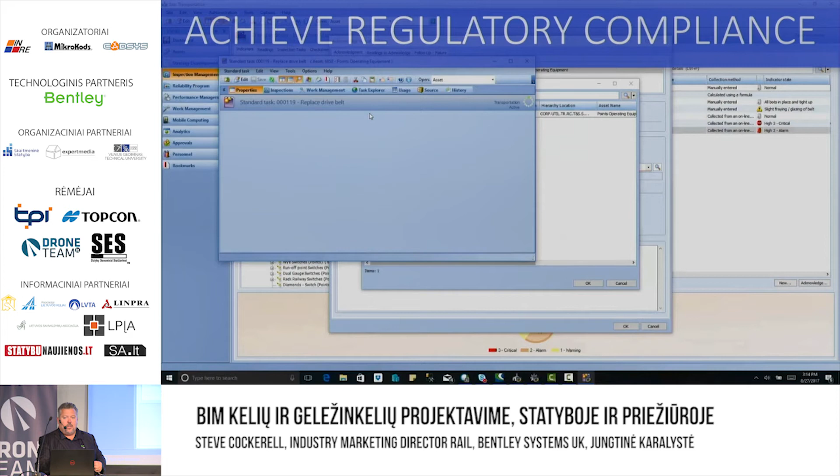So we're getting real-time information about that asset and helping us give insight to be able to improve the decisions that we're making while we maintain it. And this links through, it looks at failure modes, it helps the inspector or the maintainer identify the right solution to be able to then send it out to the crews in the field to go and maintain it, but also achieve the compliance to all of the different standards that are applied in an operational environment.

Ultimately, it's about, whether it's design, construction or operations, road, rail, or any type of infrastructure, our software and services are targeted at helping you change outcomes, improve outcomes for the future. So in road and rail, we do that with our CDE, which connects all of the different stakeholders, disciplines, data and applications, and helps them work better to be able to streamline project delivery and increase asset performance. And in roads, it's housed around that Open Roads family of products, and in rail, perhaps no surprise, around Open Rail. And with that, I will say thank you for your attention.